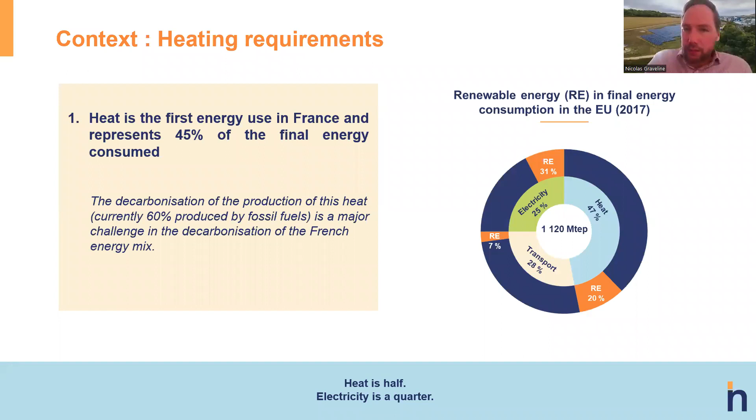One of the key aspects of this study was to identify how to decarbonize heat. So of course, the first item is to reduce. So reduce what you consume today and improve energy efficiency. The second one is recovering waste heat. So these are the first two items that need to be assessed. And of course, then you look at what you can do to produce heat from renewable sources. Today, in these renewable sources, 65% is still coming from biomass. Alternatives exist like geothermal, solar thermal, renewable gases like biogas. And of course, under certain conditions, decarbonated electricity can be used to decarbonize.

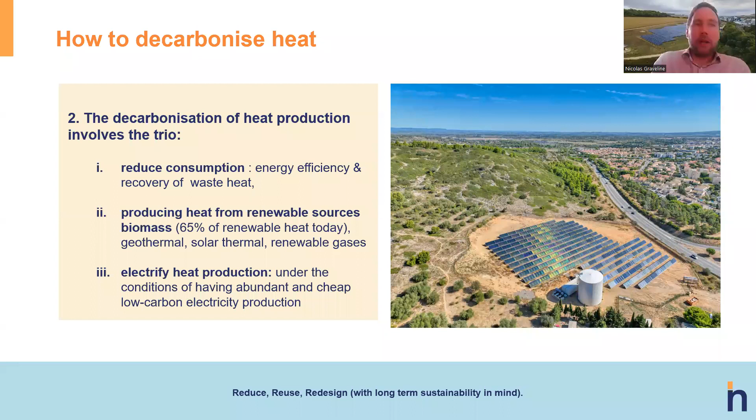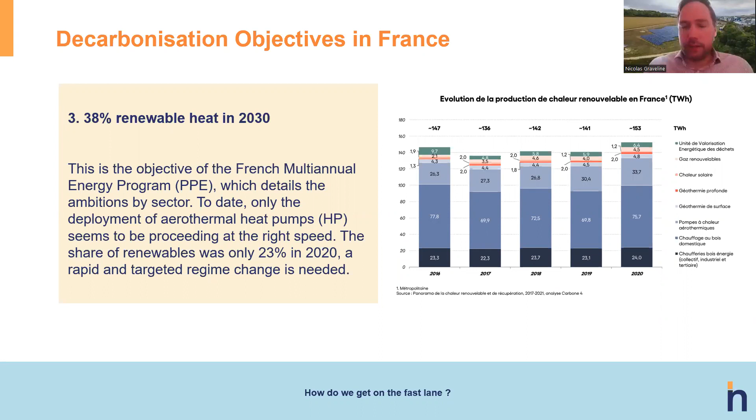The objectives in France are 38% of renewable heat in 2030. We are still a bit slow. We are a bit behind on our targets. And so I suppose what's happening in France can also be transferred to other countries where the targets have been set pretty high, but where the pace is still not there to decarbonize fast enough. So how do we get on a fast lane? That's one of the questions that we will try to answer today.

It's important to see that every heat source can cover different heat demand. So for example, we have heat pumps. They can cover the low temperature grade. Solar thermal and geothermal are more adapted to low temperature too. And then you have also all the combustion, but that must be kept for higher temperatures above 120 degrees. So always assess the merit order, merit order having multiple aspects. It can be financial, it can be impact on resources, on land, and so on.

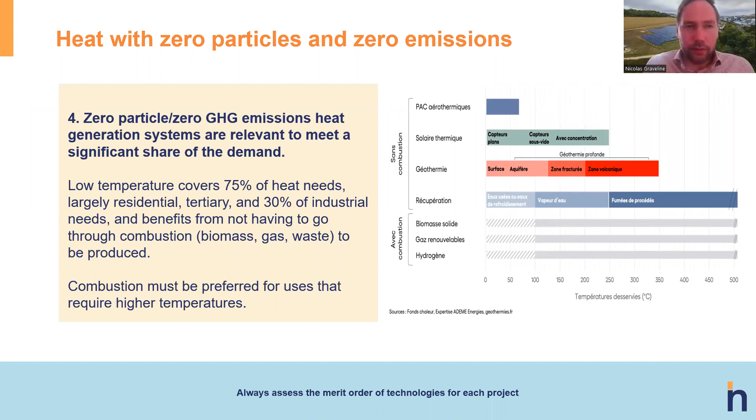So the study from Carbone 4 gave a good focus on thermal and geothermal, as they can play a significant role for all the temperatures below 120 degrees. There is a high investment cost that has been pointed out by ADEME as one of the key hurdles to overcome, or the key barrier to invest in those technologies. But of course, a few projects are happening with subsidies, and also there are a lot of actors in Europe that can play a significant role pushing thermal and geothermal.

District heating is one of the key infrastructure which can benefit from these different renewable heat sources. The picture is a bit heavy, but it's mainly to say you need to adapt the demand. The lower you go on temperature, the more doors you open to renewable heat sources. So typically solar thermal works well up to 100, 120 degrees.

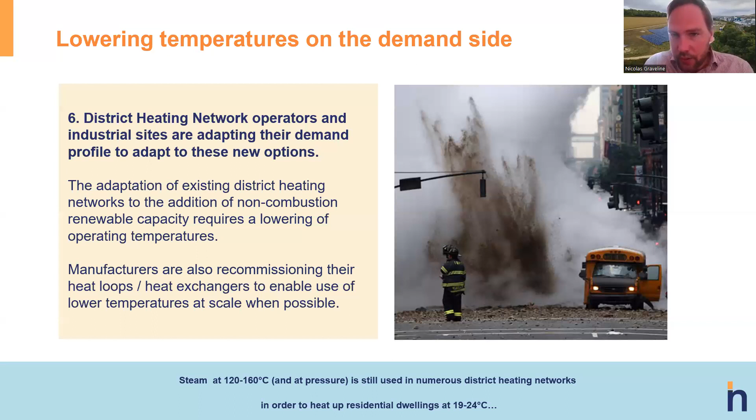If you use evacuated tube collectors, of course you can go at higher temperatures, but then you have concentrated solar, which can be a bit more stringent on operation and maintenance. But if you want to have no combustion renewable, then keep the temperatures low. You don't need to have steam at 120 degrees to heat up a residential dwelling at 25 degrees. And here you see in New York what can happen with steam networks.

Renewable heat is subsidized, and in France, we already have a few references which have been subsidized by ADEME, the Fonds Chaleur, and sometimes by a complement of specific C2E. But if we compare it to what has happened as a package to avoid inflation on electricity prices since Ukraine was invaded by Russia, we have 24 billion euros which was spent as a tariff shield, and the Fonds Chaleur is yearly only around 370 million, now 500 million. So you can see the scale is not the same to date.

I'm looking at this clock because I'm rushing a bit through, but I think I'm still on time.

I think it's really important, and that's one of the key focus of the study too, that we need to understand the role of each heat source. And of course, it needs to involve engineering companies, so that they improve their knowledge of heat pumps, geothermal, solar thermal, the other combustion renewable gases, so that everyone can be used wherever it's most suitable.

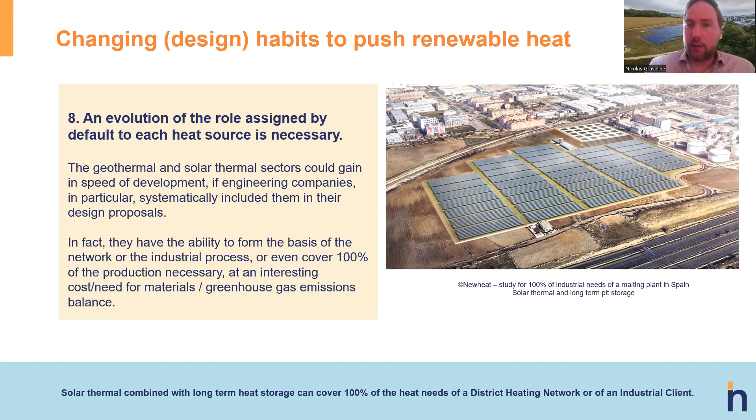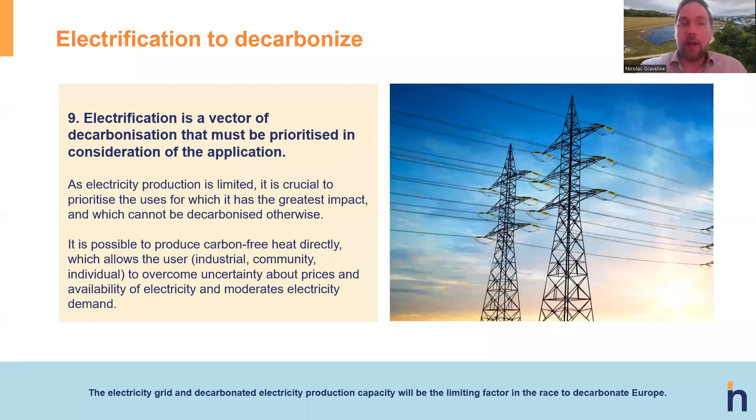Solar thermal combined with long-term storage, as you can see here in a project we had studied for an industrial client in Spain, can cover sometimes up to 100% of the heat needs for a district heating network if it's below 100 degrees, or it can also cover 100% of an industrial site as long as the process is suitable. The study points out the fact that electrification is also a way to decarbonize heat in Europe. Of course, we need to understand where the electricity is coming from and the impact on the network and on the production capacity.

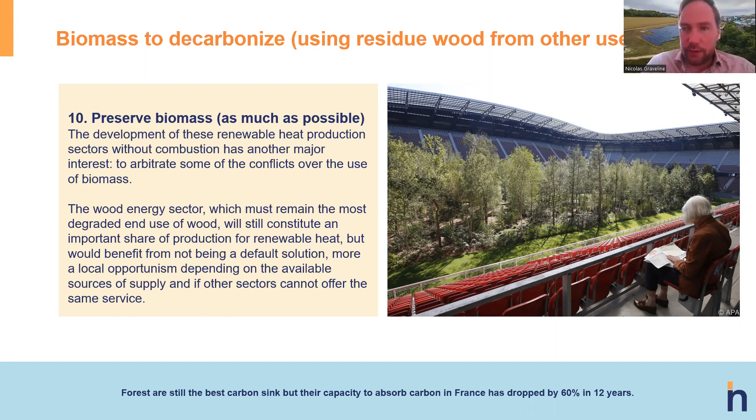And finally, the study pointed out that today biomass is one of the great vectors to decarbonize heat, namely on the district heating network. But of course, the source of biomass needs to be identified. And when possible, when the temperature is low, other technologies can be used to reduce the use of biomass. In France, the study also focused on the fact that slowly, unfortunately, the forests in France are losing their carbon sink aspect. And so that needs to be very well managed and preserved. That's it from my side. Eloi, I'll give you back the floor.

Thank you very much, Nicolas, for these insights. And I would really encourage the audience to read the report. I think the study highlights very well the need to pay more attention to sources such as geothermal and solar thermal that can support the decarbonization of our buildings, but these are also sources which are fit to meet low temperature industrial demands. So thank you, Nicolas.

Just a final note, Eloi. Please. The executive summary is being translated in English at the moment, and a big work is being undertaken to also translate the study, which unfortunately is still only available in French. Okay, great. This is really good news. So at some point we will share that with our members and participants today. Okay, so thank you again, Nicolas.

I'd like now to turn to our next speakers, Hugo and Joël. So Hugo, you are Secretary General at SNCU, which is the association in France representing district heating and cooling. Joël, you are Head of Public Affairs at AMORCE. AMORCE brings together cities in France which are the most active in the energy transition. And this morning you will share with us in a combined presentation the latest data on the French sector and the outlook. Thank you. Please go. Thank you very much, Eloi. Good morning, everyone.

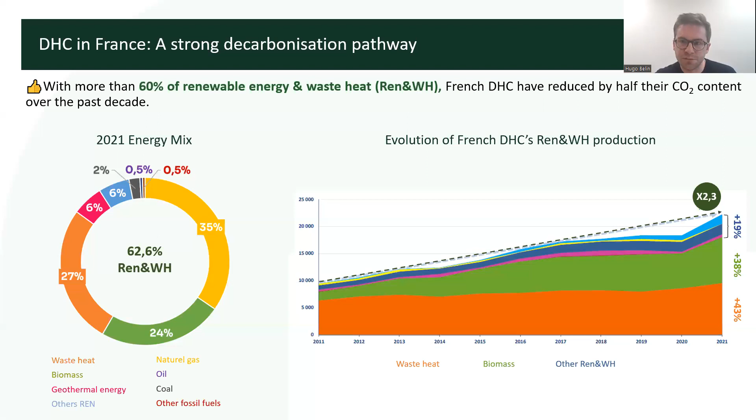As a result, we reduce our CO2 content by nearly half every 10 years. On this picture, we present two CO2 contents, the first one in direct emissions, the second one in life cycle analysis. Actually, in France, in the future we will only talk about life cycle analysis, because we recently changed our building regulation, and it switched from direct emissions to life cycle analysis.

As a result, DHC operators will need to speed up their decarbonization process, because the new French regulation doesn't allow carbonized heating systems such as DHC to connect new buildings. So more than 300 DHC systems are currently planning new greening and decarbonization strategies, and it will all have to be achieved by 2028.

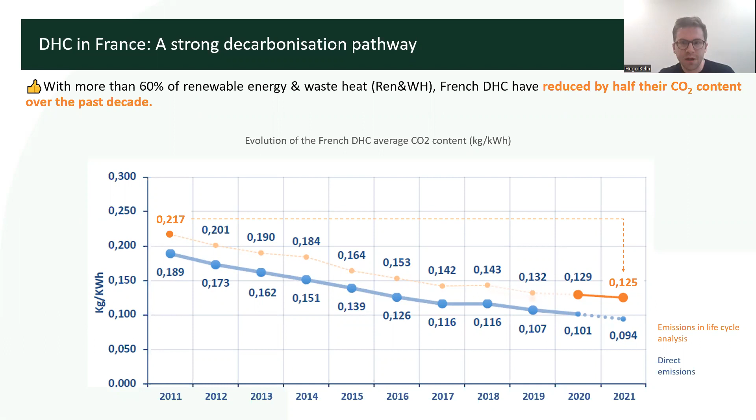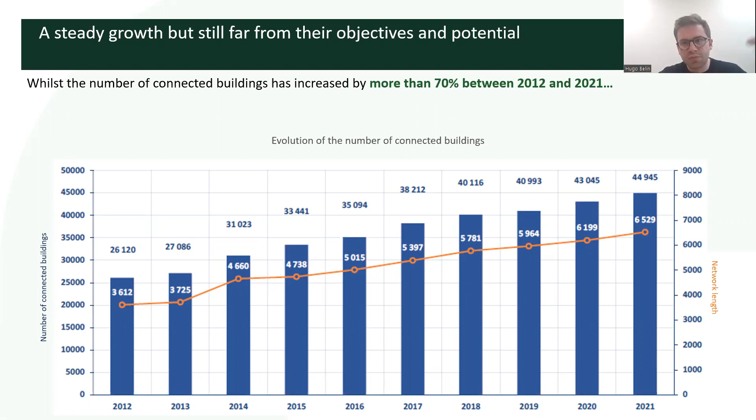As you can see on this slide, French DHC always kept on connecting new buildings and developing. Over the past decades, the number of connected buildings increased by 70%, and the network has always been extended. However, what this slide doesn't show is the number of new DHC systems created each year, which is less than 20 every year, and we need to be way above this number. We will present with Joël how we can manage it and the potential after this.

So there are three ways to achieve it, and Nicolas talked about it. First is to speed our greening, then to create more DHC systems all over the country, and we will discuss it with Joël. And the third one is to densify, to connect more buildings, especially in dense big cities.

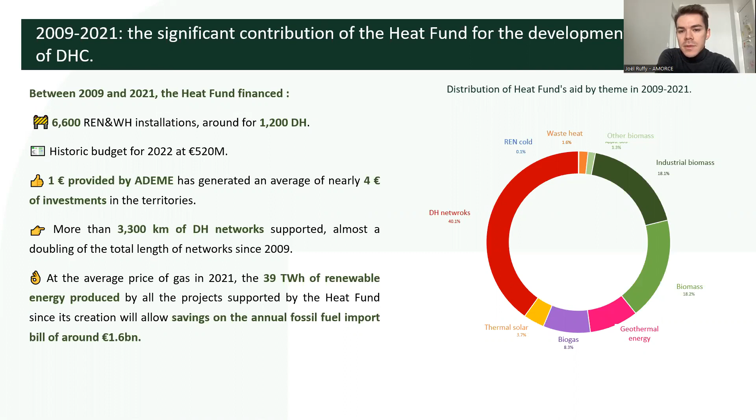It's very good, but as you can see in the other slide and as Hugo said, it's not enough to realize our objectives. You can see also that the Heat Fund is a very good investment for the French government and for France, because we know that €1 provided by ADEME generates an average of €4 investment in territories. So it's a very good investment. And the development of DH relies very strongly on this Heat Fund. You can pass.

As you can see in this slide, what I said before is that during the crisis, which is not over, DH is more beneficial for customers, because you can see that the variations are less important for DH prices than for individual gas and electricity solutions. So you can see on this slide the variation without and with the tariff shield applied in France. The green line shows DH variation that is much less important than the individual solutions.

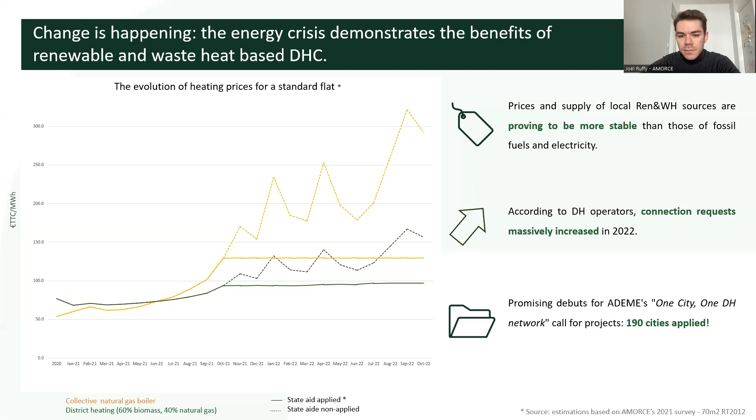According to Hugo and DH operators, connection requests massively increased in 2022. And it's a good thing. The Ukraine crisis and the energy crisis in France are relevant for the development of DH. It's a very promising debut for the energy transition, and ADEME and the French government applied different programs to help cities develop new DH and to facilitate the connection for customers. You can go to the next slide.

Thank you, Joël. With Joël, we presented to you the current situation of the DH market and the heating market. To summarize it in one sentence, the current energy crisis and the current Ukrainian war is a game changer in France. So now, how can we address this new situation, how can we manage this game changer and speed up the energy transition? First, for us, it is to develop DH systems all over the country.

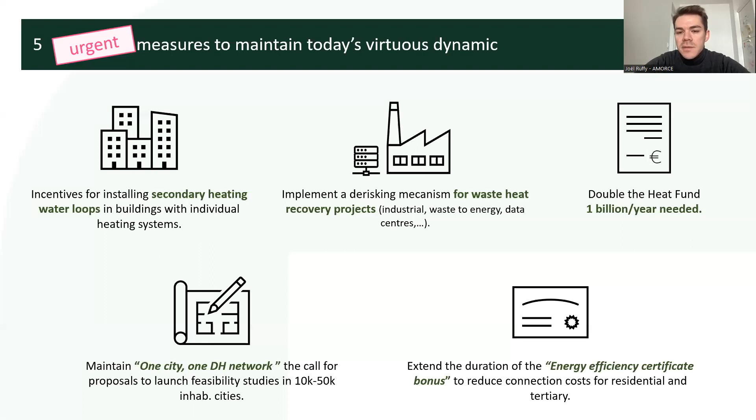Thank you very much, Joël. Thank you, Hugo. You provided a lot of very useful information. It's clear that this is the moment for district heating in France, and I think you also made quite clear that there would be a need for more support to accelerate the pace of the heat transition. Now, before I open the floor, I will call Nicolas again to put some flesh on the bone, so to say, and present a real project developed by Newheat in the city of Pons.

And Nicolas, I had one question. Sorry, I need to go back to questions. Which kind of long-term pit storage are we talking about? So Nicolas, when you present the project in Pons, please feel free also to address this question.

So please go ahead. So on long-term storage, you have today two types of storage that we can consider in terms of duration. One is really the short-term storage that would cover 2, 3, maybe a week's needs of heat, and typically it's a small steel tank, a few thousand cubic meters, and it's only to adapt demand and production while the solar thermal, heat pumps or other renewable sources are producing, for example redistributing it at night or over cloudy days.

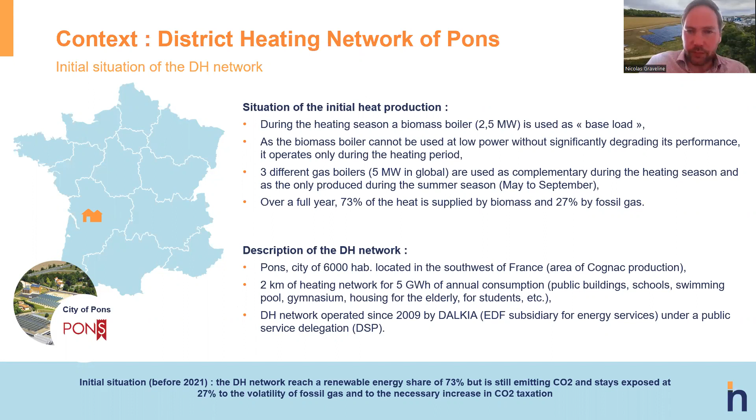So it was already quite a renewable district heating with 73% shares of renewable from biomass, but still 27% of fossil gas that needed to be replaced. The operator is Dalkia. So in France, it's a well-known company which is mainly focusing on managing the district heating and providing heat to the network. So then we were approached by Monsieur Mougard, who was director of the Communauté de Communes, and who wanted to do something about this district heating network.

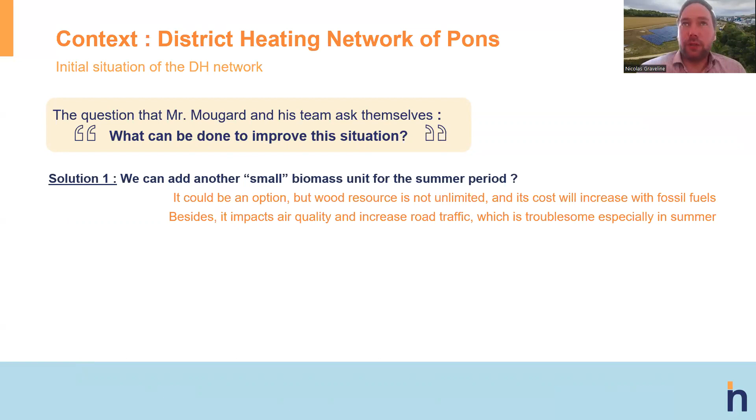And so the first approach was to say, okay, can we replace the gas boiler by a small biomass unit? And unfortunately, there were a few things we had to cover to validate or invalidate that option. In the area, suitable wood resources were limited. And there was a bit of variability in the costs that we have seen in the last years. And of course, it was in the middle of the city, so they said, maybe we can also reduce the particles or the emissions that we're injecting, especially in a tourist region, they wanted to reduce that in summer.

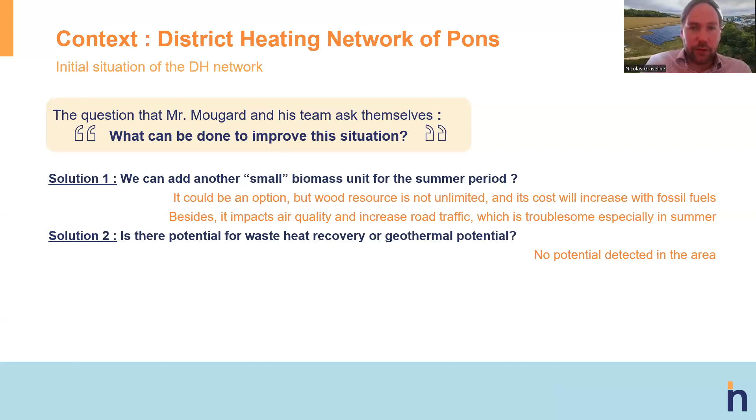A second aspect that we wanted to cover is, can we on the network see somewhere waste heat that is not used? Unfortunately, I don't know if you know Pons, there wasn't any big industrial site that could re-inject their waste heat in the network. There's no other sources of waste. Finally, they said, can we use heat pumps to replace the gas boilers? Yes, that was definitely an option that we illustrated. We pointed out that the price would be indexed on electricity price, of course, and that shied them off, and they decided to go for a third solution, and they mentioned solar thermal.

I think they had heard about it, but soon came the fact that they didn't really know what it was. They thought it was maybe photovoltaic with some kind of different system. So we had to clarify that. And then we mapped what we could do in terms of specific constraints of the district heating network, of the land availability, in terms of resources locally, what was available in terms of biomethane, alternative renewable sources. And so we came out with a final solution.

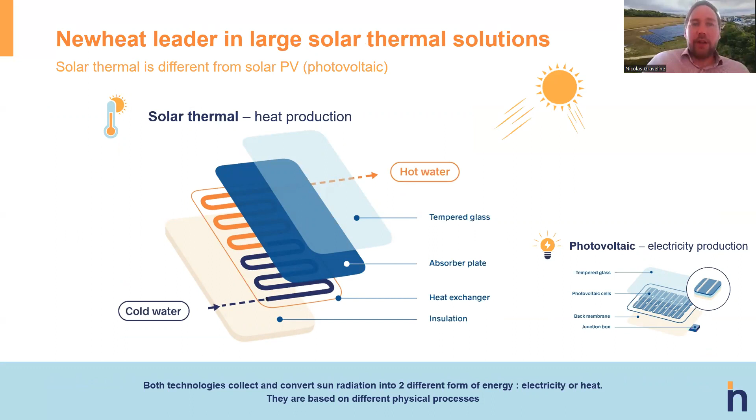Just this quick slide to say, this is a common mistake. Solar thermal is just a steel plate absorbing the heat from the sun, but it's not producing any electricity like photovoltaic. It's a different technology, very simple, very low tech, but extremely reliable on the long term.

So we compared then the land grab, if I may say it, of different technologies. So for 1 gigawatt hour of production, you needed 10.5 hectares of forest in the area. We have a lot of land which is secured for biomass, mainly for construction, but also a bit for energy. And we know we need about 10.5 hectares to produce that gigawatt hour. If we were comparing it with photovoltaic, it was 1.6 hectare to produce 1 gigawatt hour of energy. And then for thermal, we see it's 4 times more efficient than photovoltaic. So this is an interesting point for district heating, especially when land is an issue in some dense areas.

And then this study on the right was done for the district heating network of Narbonne, another district heating network on which we've provided a solar thermal plant. And locally, based on local constraints, they assessed the sources of emission per kilowatt hour produced. As presented previously by Hugo, I think we are on average about 125, if I remember well what you presented, kilogram per megawatt hour. And we see that, of course, gas is a bit higher with a direct emission, which is quite intense. But here we compare life cycle assessments.

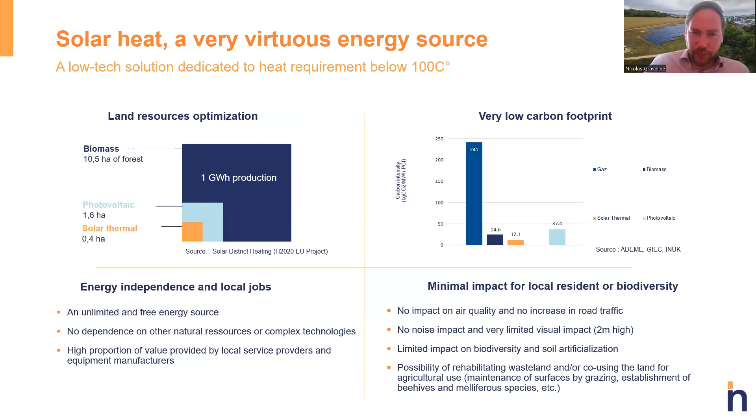Just quickly, what happened in Pons. So here we have the beginning of the construction on the left, and this is at the end of the construction. So we had this little area, which was a public land available for the plant, just next to where historically the biomass, or where now the biomass still is.

And here you see, Edouard, you mentioned before, what is a storage tank, thermal storage. Here you see this is the short-term thermal storage that we have installed for Pons. And here at the end of the installation, it's insulated by outside, but it's mainly a steel construction.

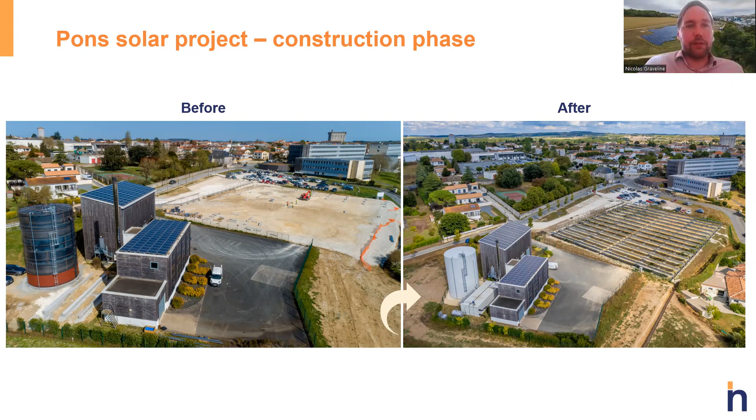So what did we do on Pons, and why did I want to present Pons? It's because it's quite an innovative project where solar thermal can cover almost 100% of the requirement during a few months in summer when the sun is shining. And so the biomass can be completely put on standby.

Then in winter season, of course, the production of solar thermal drops a bit, but it can preheat the return pipe from the network. And then the fact that we have a storage allows us also to improve the overall efficiency of the biomass, because it doesn't need to ramp up and down. It can inject excess heat, and this heat can then be used during peak in the morning, because it's a district heating which is very exposed to residential patterns, so high in the morning and high at night. And so it increased, of course, the share of renewable in this district heating network.

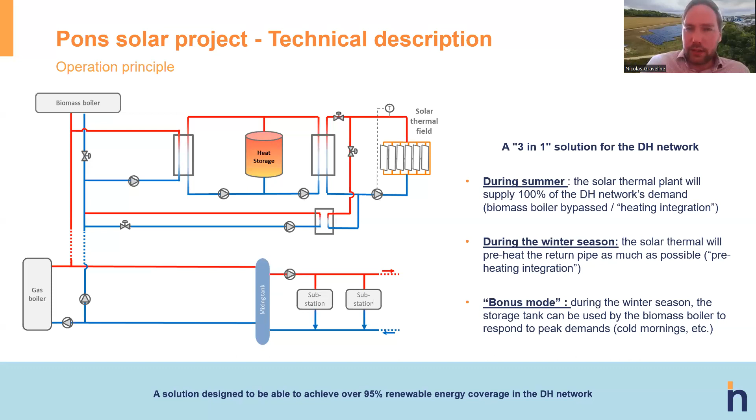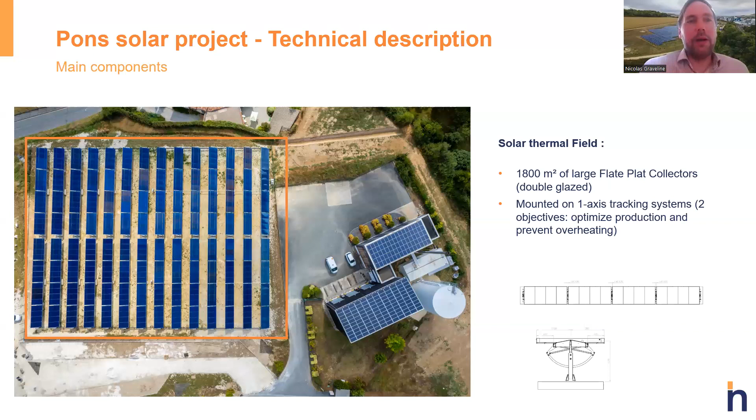Why did we want to present this project? Because it's quite innovative in terms of solar thermal. It was the first plant using trackers, which allowed them to focus on the sun, but it also has the benefit of being easy to operate. So in case we have excess heat, our storage is full, and the district heating cannot use the heat, we can off-track our solar thermal panels. It's like an on-off button, and we can so operate it more finely.

Then, of course, to balance production and demand, we have a heat storage, which can be injected, as you saw, at multiple stages in the heat production cycle. The importance is that it's kept out of oxygen to avoid rust and corrosion, and to make sure that it can be operated for 25 years. And of course, we need to keep a good stratification in the storage, so that we can keep high temperature at the top, lower temperature at the bottom. And by increasing this delta T, we have a larger storage capacity.

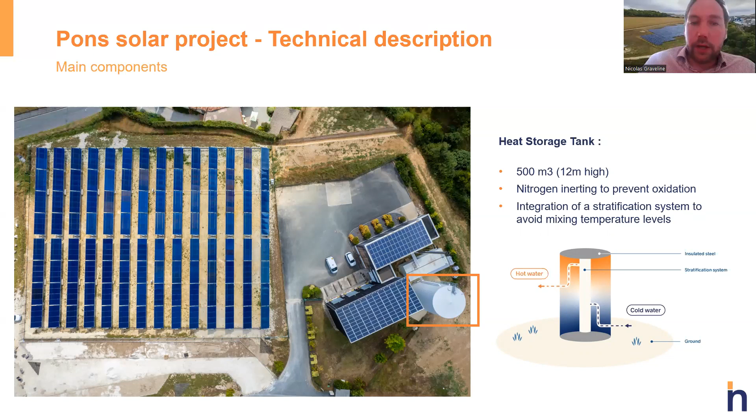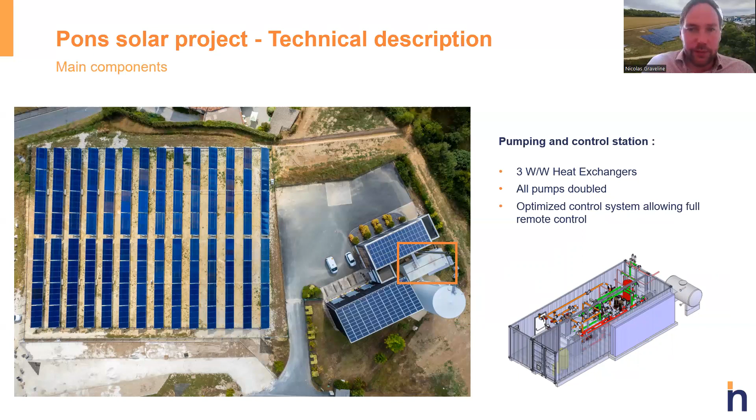And this is just a distribution hub, or the solar skid as we call it, where we have the pump, the heat exchanger, nitrogen preparation, and all the automation and controls. So this is the supervision that we have. We won't go too much in detail, but it's important to say that all our plants are operated remotely from Bordeaux, and then we work locally with operators which can have an intervention if something is required.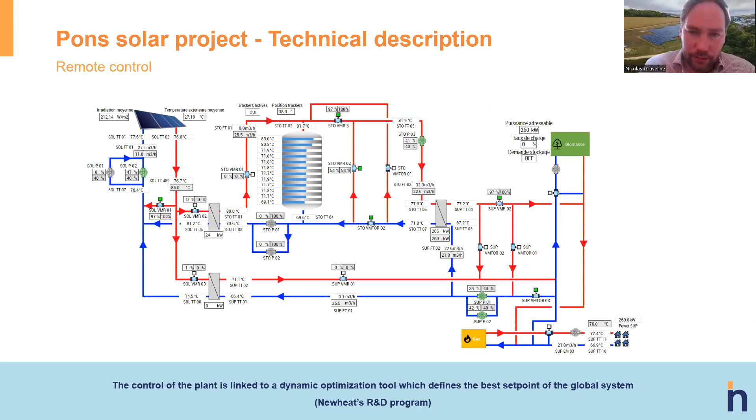One interesting aspect of this project is also how it was structured. With the business model around it, Newheat is not a sole investor, but is the owner of the assets, and has created an SPV, which is a project company dedicated to operating this plant. So solar thermal, storage, heat, and the pumps for distribution for 25 years.

The finance was done by Newheat, partially by a financial institution, and finally 3 regional funds took a minority stake in the SPV to push this transition to a greener district heating network. The SPV is an autonomous company, so it can be profitable for 25 years. Yeah, and so that's a key structure which was designed around that. And so Newheat is the long-term operator of this plant, providing heat to the other operator, which is Dalkia.

So we have a bit of background of this plant because it's operating now, and so we know how it really works. It's always interesting to have the modelization and to see that we were quite close to what is actually delivered to site. We have a good production over summer. As you can see, we cover almost 100% in June, July, August, and then in winter we drop back and leave the biomass working full speed. But then, of course, the biomass can also use the thermal storage, as we said before. And so 200 tons per annum, it's a small project, but still it's quite an interesting case study to present.

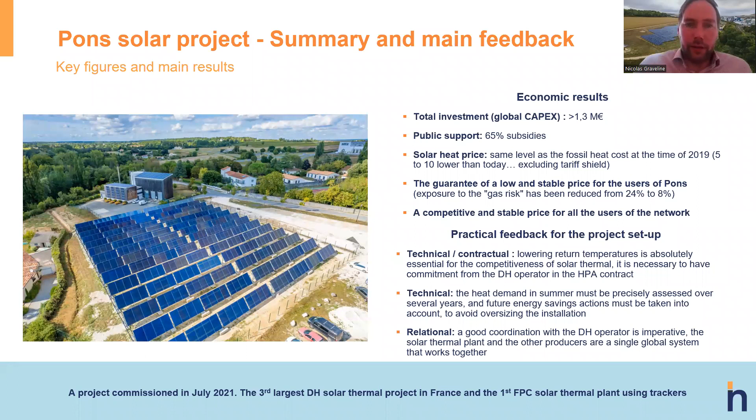And finally, what were the economic results? So for a capex of 1.3 million euro, which was covered by 65% subsidies. So we are really grateful that the system in place in France allowed for great support of this technology and made solar thermal economically viable here against other fossil fuels. The thing is they have a solar heat price which is stable over 25 years. It was a price that was competitive for the network and brought down the price level for the end user.

Finally, the practical feedback that I would like to point out is, first, a good collaboration upfront with the district heating network is necessary to plan reduction in temperature when it's available and to make sure that solar thermal can be used.

The summer demand is always quite a difficult one, because if it's overestimated, then of course we have overproduction in summer, and the investment doesn't benefit from that if we have to waste heat and use energy to remove heat. And of course, the link between the city, the operator, and us, NewHeat, as a solar thermal plant operator, is key and is the only way a long-term partnership can happen.

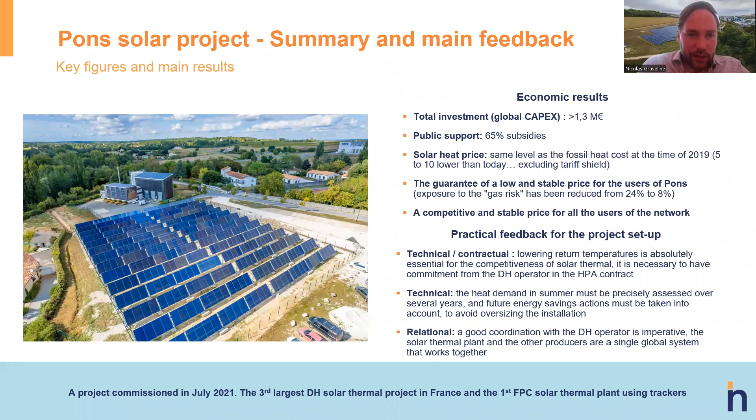That's it from me on this specific case study. Thank you, Nicolas. I think it was really brilliant.

Nicolas, I have one question to you. How do we make sure that we have many more projects like in Pons? I mean, your view as a project developer. So is financing the bottleneck? Are there technical or organizational barriers? Do we need more systematic coordination of actors at local level, more heat planning? What do you need?

I think it's important to have an overall knowledge of renewable heat, which is expanded through engineering companies, through operators, through cities, which are also the planners of the cities, to make sure that thermal, heat pumps, biogas, biomass are always assessed and compared with their merit order for each technology. So I would say there's a technical aspect which is linked to the engineering knowledge around this solution.

Then, of course, one item that we mentioned before is if you can lower the temperatures in the network, then you open doors for more technologies. Of course, if you go above 100 degrees, then biomass and gas seem to be the great candidates. But if you can lower the temperature to only the required temperature, then you open the door for quite efficient heat pumps, solar thermal, and geothermal technologies.